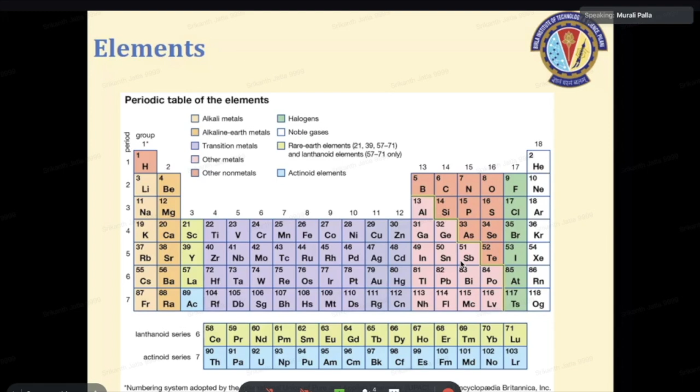And as we progressed in science, we now discovered that there are not 5 elements, but there are more than 100 elements that are there, most fundamental. And we have a whole periodic table. And again, these are very few elements. 100 elements is very small in comparison to the materials that we see every day. So how are so many materials coming up from the combination of these 100 different elements? That is something that is very interesting, right?

So how is this soil getting transformed into tasty mangoes, and what makes them so different? If you look at coal, it is made of carbon. Majorly it is carbon. And again, if you look at diamond, it's again carbon. But what makes it so precious? So atoms arranged in a different way become so precious, and atoms arranged in the other way can be so poor.

Again, another example, look at the chalk piece. It's made of calcium carbonate, a mineral of calcium. Then again, if you look at our bones, they are again made of calcium and collagen, right? So these are fundamentally the same thing, yet they have very different properties. The material bone has, they say,

Murali sir, your voice is not audible.

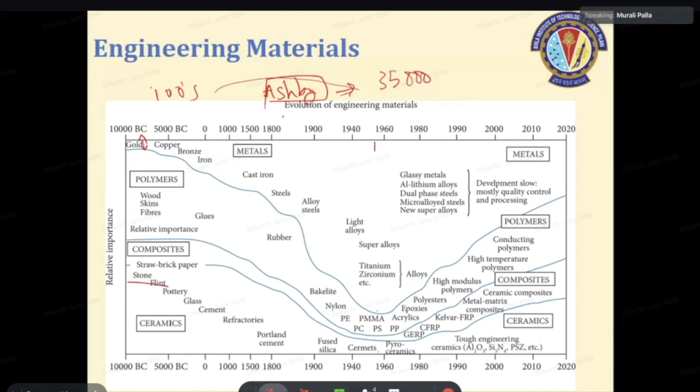And as we progress from the 1960s to the 2020s, we're again going back to the olden days. The importance of metals has been diminishing, and we are seeing more polymers, composites, and ceramics. This is an interesting observation. So many man-made materials have been developed. There are semiconductors, which make all the electronic gadgets, and superconductors. Research is going on; if we achieve room temperature superconductors, we all know it can make wonders.

Graphene and related materials have been discovered. So many new materials have been developed: semiconductors, superconductors, graphene, metallic glasses. Okay. Lightweight materials. If you have to fly in aeroplanes, the reduction in weight directly translates to economy, because the reduction in weight reduces fuel costs.

And that directly translates into saving of fuel and saving of money, so strength is a very important property of material. And likewise, electrical resistance - if you reduce electrical resistance, you can make less electrical dissipation, there will be less energy losses. There are hundreds of properties, and we still continue to invent more and more new materials.

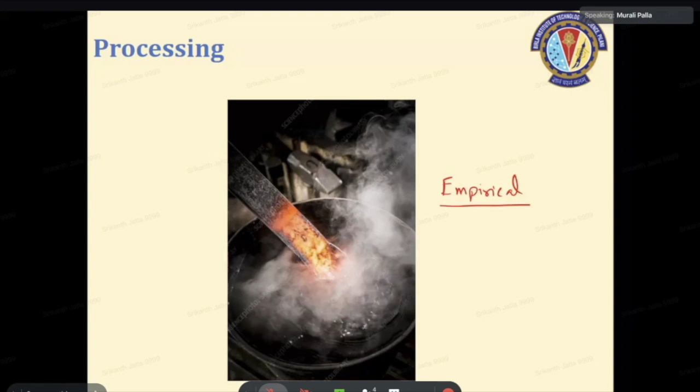I don't know whether it is true or not. People observed this quenching process when, in some European communities, people tried to kill people and used slaves for hardening their steels, for hardening their swords. They took the swords, heated them to very hot temperatures, and stabbed them into the slaves. They believed these slaves had some kind of mystical powers, and because of that their swords were hardening. What was actually happening is these very hot swords were quenched because of the cold blood in the human body, and such cruel measures were used.

But nevertheless, that is how things have been discovered, and to a much later stage, even today, many blacksmiths use this technique unknowingly. They don't know what is happening at the fundamental level, but they nevertheless use this technique to harden the material.

Even today, most of the engineering that happens in the materials community happens in an empirical manner. For many things, we don't know exactly what causes them - like how fatigue can be improved. People do a lot of experiments, and whenever the experiment clicks, we get a result. Something like coronavirus - we don't know what is fundamentally happening, how things are happening. People are trying medicines like chloroquine, invented for a different disease, and trying to do all these kinds of things.

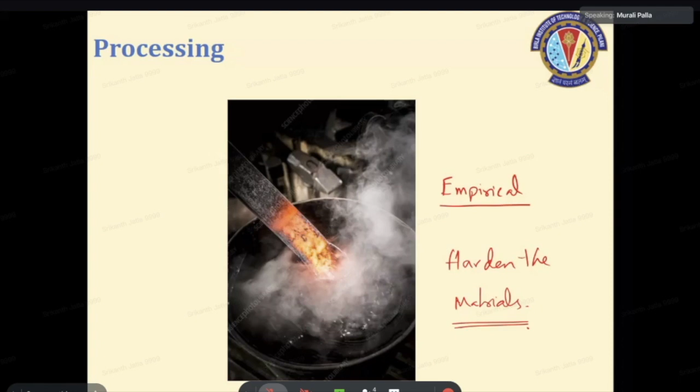So until we develop some kind of basic understanding of the science behind any phenomena, even today all we can do is rely on this experimental data. The effort in material science, which is a paradigm shift, is to understand how all these processes in materials can be connected to their fundamental things - how atomic arrangement can be manipulated to affect mechanical properties or any other properties. To achieve desired properties, how do we change this material? Understanding this is the usual paradigm we follow in material science.

So at the core we have something called structure. All the material is made of some building blocks, and these building blocks are arranged in different manners. This structural arrangement of these building blocks is the structure, and these different structures give rise to different properties. Now this structure can be changed by the processing, such as heat treatment - we have just seen an example - and this will lead to an improved performance. So this is our end goal: we want to make materials which perform.

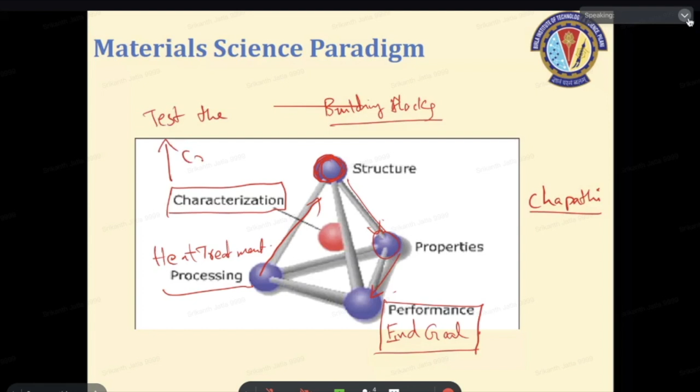So you have to test the crispiness of the chapati, crispiness or the tenderness or whatever you call it. So you have some vague property in your mind and you have to quantify that property and develop tools to measure that property and to tell whether it is meeting the goals or not.

So structure, characterization - these are the parts that we have to understand how to make materials. It's like the whole thing is about making materials. So in order to make materials which have very interesting properties, you need to understand all this basic and fundamental stuff which we study from 11th, 12th classes, very basic stuff.

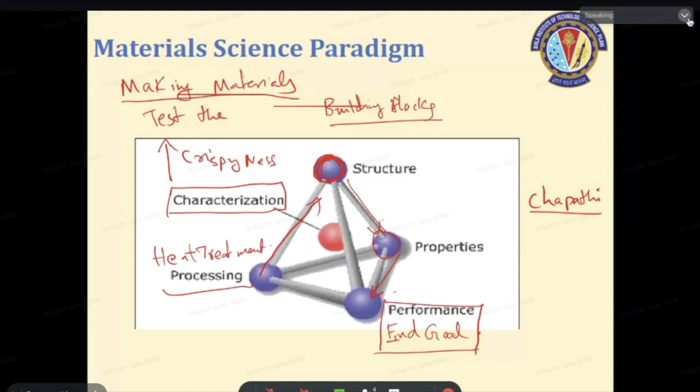So when we talk about the structure, what level of structure are we talking about? There is a structure at every different length scale. At a very small length scale, we have atoms. And atoms, we have at the nucleus, at the core, we have these protons and neutrons, and electrons in the shell.

There are still some ambiguities, like what is the internal structure of these protons. These protons have still further internal structure - they have some quarks in them. So we don't go too deeply into that structure. That structure is basically more interesting for physicists, who like to understand what is the structure of the universe and all that. You have to dig deeper into this atomic level.

Now at a slightly bigger length scale, we have these atoms, and these atoms are arranged most of the time in some kind of very nice patterns - not arranged randomly, they are arranged in some perfect nice patterns. We see beautiful patterns which are regularly periodic, repeating, and those patterns have been classified.

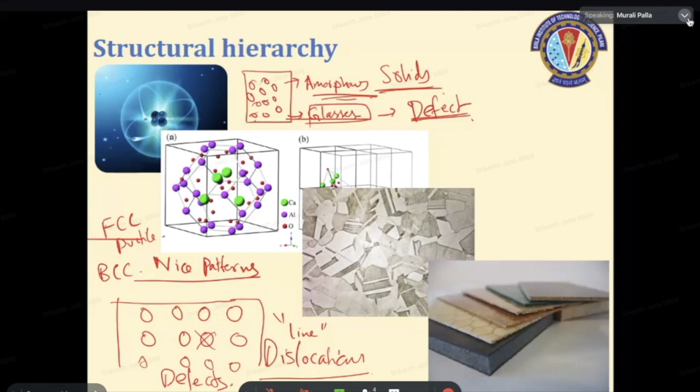These are aspects of crystals. Now, if you talk about glasses, because there is no periodicity in the first place in the glasses, we do not have anything like a defect in our glass. We can't have a vacancy because we don't see any periodic pattern there. So it's very difficult to describe what is the defect in our glasses. But still, the glasses also show different types of configurations and they have different properties. We'll speak about it a little later.

And a little above this crystalline structure, at a larger length scale, we see this microstructure. What is microstructure? These crystalline materials, the periodicity will not endlessly continue. It remains only up to a certain region. Now, if you cross this region, then you will see another crystal in a different orientation and so on, and you see different phases. These phases are distributed at a length scale which is of the order of 10⁻⁶ meters, that is micron. Hence we call this structure that is revealed at this length scale as a microstructure.

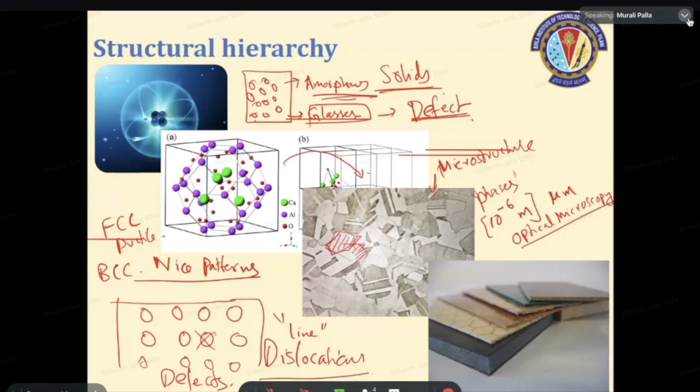And this kind of structure that you can see on materials can be viewed from an optical microscope. So materials can also be manipulated at this level to change their microstructure and to achieve desired properties. Now, at a much larger length scale, you have this macrostructure, where things are really big, meaning you can visibly see with your naked eyes. So you have things at the millimeter, and you can also have things at the meter and kilometer ranges, right? So this is the whole gamut of structures at different length scales. And we have so many materials, and each material is manipulated at a different level, at a different length scale.

And so many experimental tools are there to characterize this microstructure. Our interest in computational material science lies in all these length scales. So there are people who work at different length scales. At a very small length scale, if you have to understand what is happening here at the fundamental level, what physics should you use? We use quantum mechanics to describe material at this level. You have computational tools to solve these quantum mechanical equations and to predict things that are happening.

And then we have molecular dynamics, atomistic simulations, Monte Carlo simulations to study things at slightly larger length scales. And then we have phase field modeling, CalPhaD, etc. tools to understand things at this length scale, the microscopic structure. And at a much larger length scale, we do things by very regular routine tools that are FEM-based tools, ANSYS, Abaqus, and so on.

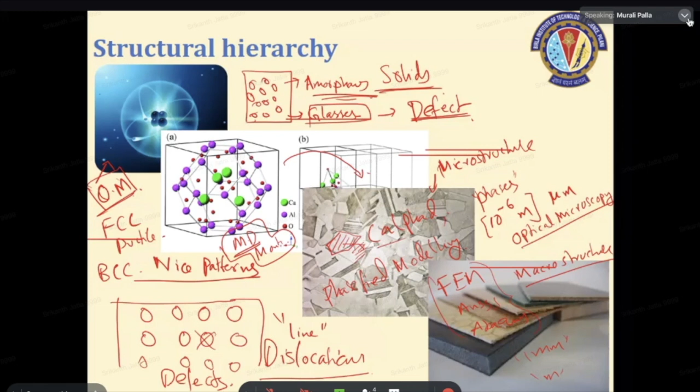So what computational material science you are doing depends on what length scale you are studying. It's like at what length, what is your interest, okay? And depending on your background, you can pursue research in any of these areas. And before going to study, you first have to be clear with your fundamental concepts. This is what I described here. There are different tools at different length scales. To understand all of these things, you have to first dig into our basics.

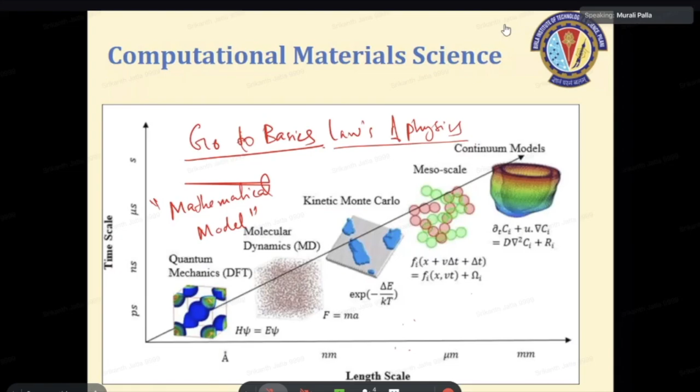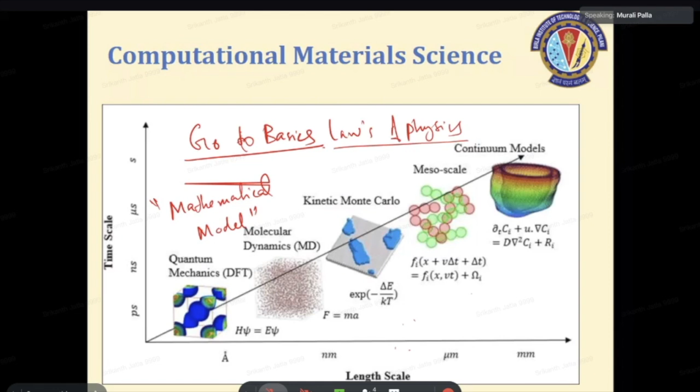So whenever you have a composite, you mix materials which have complementary properties. So one is like very high. Bones need to have rigidity. If the bones are not rigid, the bones will become limp. It just looks like a skin. Imagine a man without bones. It simply limps, right?

So stiffness is an important thing, but if the material becomes very stiff, then it becomes brittle, and the material will fracture very easily. So here you need to have a material which has very high rigidity as well as high toughness. So bones are cleverly constructed in such a way that they have these two properties.

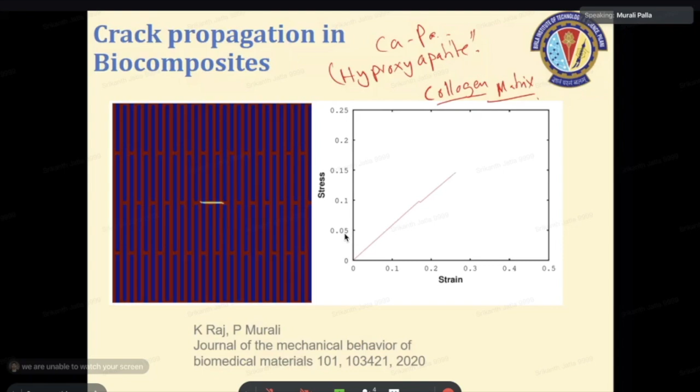Now can you see my screen? Yeah, it's loading. Yes. Good afternoon.

We will now discuss how to do these things in computation. So basically what we have here is we first have some physical law. It can be many things. It can be Schrodinger's equation, it can be Newton's law, or the diffusion equation. This physical model, we can describe in some kind of a mathematical model.

So from the physical we get a mathematical equation. This job is generally done by physicists, and sometimes we as materials modelers also invent new equations such as phase field equations. So there are so many modeling techniques and so many equations. Solving each of these equations, we will be able to solve different varieties of problems that occur in materials science.

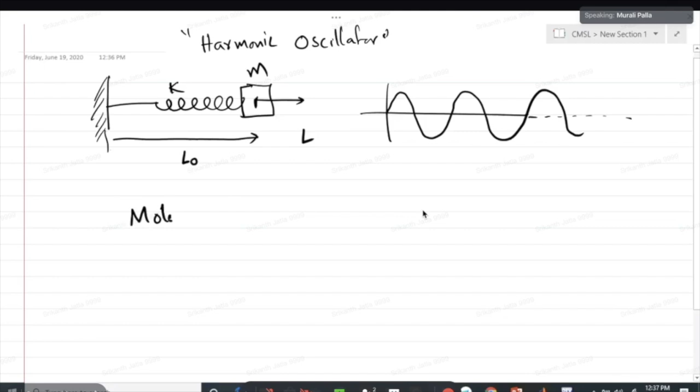Okay, if you understand this thing, you will understand the whole thing of molecular dynamics. Okay. Essentially, in molecular dynamics, we do the same job, but here the only difference is here there's only one mass and there's only one spring. But in molecular dynamics, we have n number of atoms. It's so many springs. So you have one atom here, one atom here, one atom here. You have different atoms, and then each of these atoms are connected by springs.

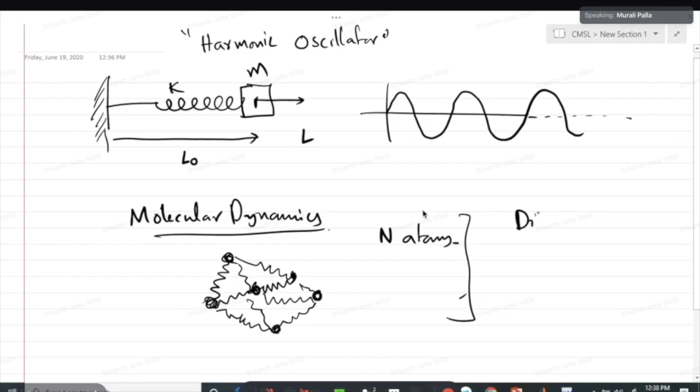So to understand all these phenomena, first you have to understand these two basic things. Okay? So later, if you want to graduate to other subjects, you can study. You can also try to solve the diffusion equation, the Cahn-Hilliard equation. So you can do this as exercises. Okay? So you take this diffusion equation and try to solve it numerically and see how you can predict different things from the diffusion equation.

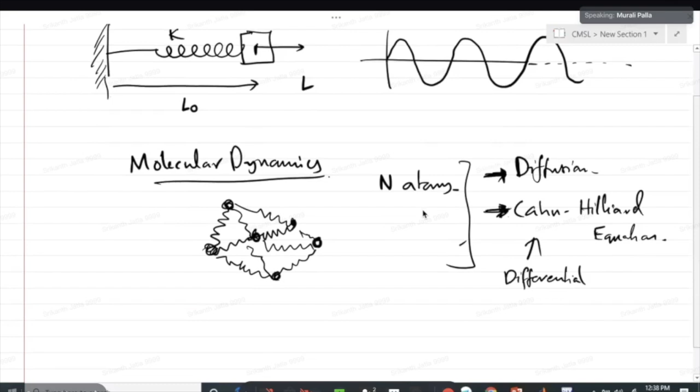You can also do a numerical investigation of the Cahn-Hilliard equation, which is again a differential equation. You can search in Google. It describes the microstructure evolution in solids. Okay, so different equations are there. We'll start with the simple things.

Okay? So what equation governs this first problem? The first problem is governed by the following equation: F is equal to ma. Very simple. Okay? So what is the force that is acting on the spring? That is minus kx, this is Hooke's law, is equal to m d²x/dt². So we got a differential equation here. Now this differential equation we have to solve numerically.

So what is the analytical solution for this equation? When we study numerical modeling, we always study some simple models, okay, and then the same principles will go into the more complicated problem. So here the equation is simple, you can easily solve it analytically, but you can also try to understand numerically how to solve this equation, because it has important implications in molecular dynamics simulations.

So you can recast this equation as d²x/dt² is equal to minus k/m x. If you solve this equation, you will get x is equal to some c1 sine of √(k/m) t. You can put some appropriate boundary conditions, and then for some appropriate boundary conditions, you can show that the solution is something like a sinusoidal function.

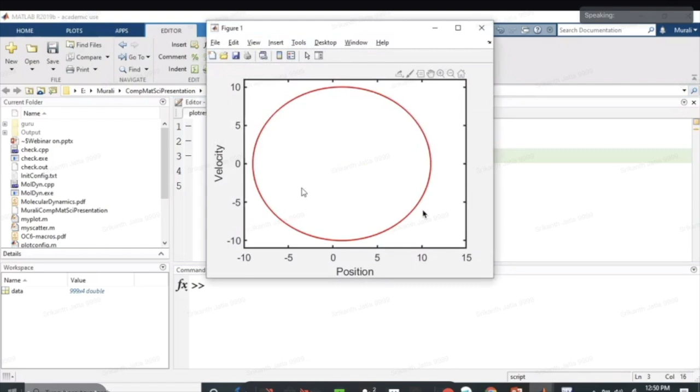So the same principle we use in solving molecular dynamics. So I'll open another code here. These two codes I will share with you. I'll share them with the organizers and they can share them with you. Please be in contact with the organizers.

So this is the main molecular dynamics program. I have created this only for the purpose of illustration. If you understand this simple code, you can operate any molecular dynamics simulation code. First, you have to understand what is going on. This code will not be very efficient from the speed point of view, but it has all the necessary ingredients in it. Okay?

So in molecular dynamics you have some variables. Let us first look at the variables here. I have defined a class and these are the variables. We have x coordinates of all the atoms. This is a two-dimensional code; for simplicity I have written it in 2D. Y is the y coordinate of all the atoms. Vx is the x component of the velocity of all the atoms. Vy, ax is acceleration, ay is acceleration.

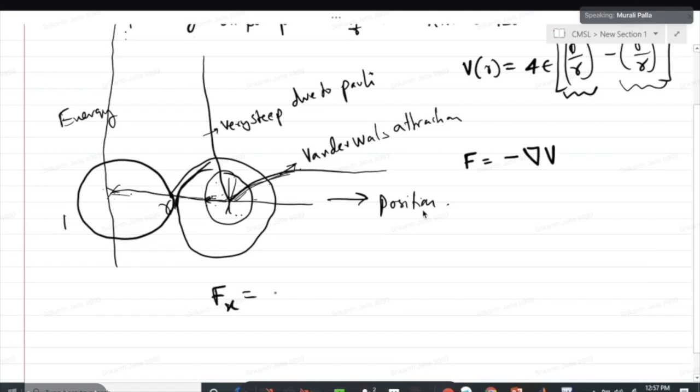So this is a potential. This part describes the repulsive part, and this gives the attractive part of this interatomic potential. Alright. So in order to calculate the force, we have to write F is equal to minus gradient of this potential energy. If we do that, we get Fx is equal to minus ∂V/∂x, which is given by minus dV/dr times ∂r/∂x.

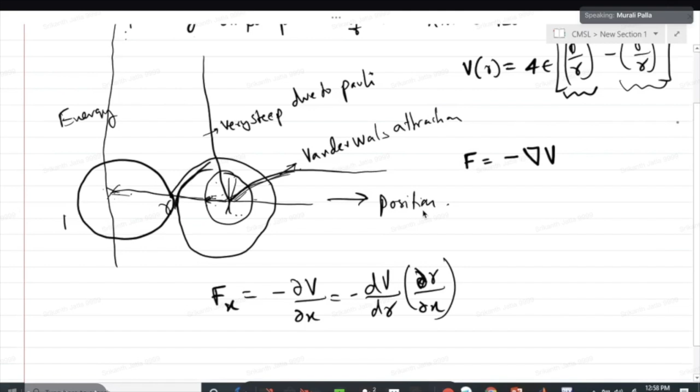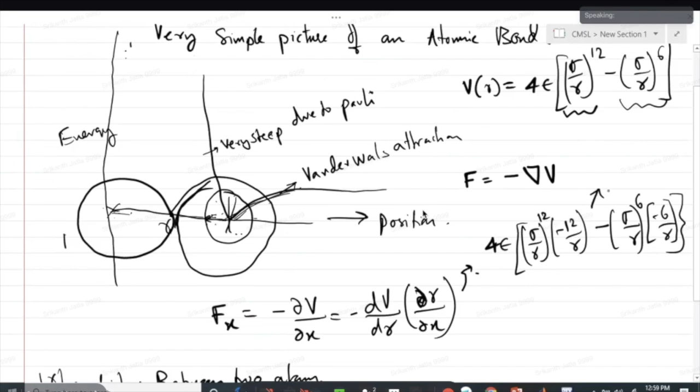Now what is r? r is equal to the square root of x square plus y square, where x and y are the coordinates between these two atoms. Okay? So let us take a system where the first atom is at a location given by x and y, and the second atom is located at a point whose center of mass is at xj and yj. What I want to do is calculate the force on this atom.

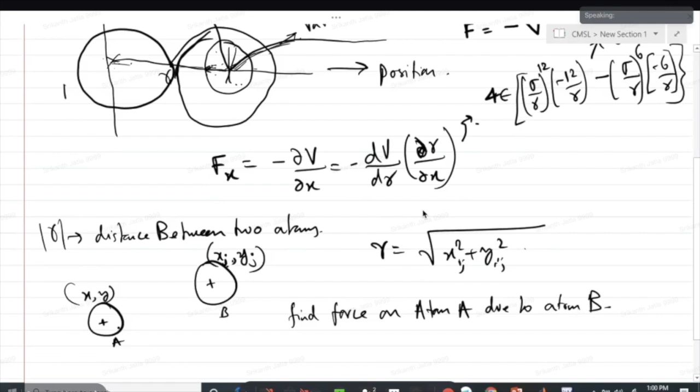Let us call these atoms A and B. Find the force on atom A due to atom B. How do you do it? First, the dV/dr term will be the same thing. Calculate the distance. That will be the square root of (x minus xj) squared plus (y minus yj) squared, that is r. And if I do dr/dx, I'll have (x minus xj) divided by r. Now plugging back all these things, I'll get the force between these two atoms, and I'm ready to solve the problem.

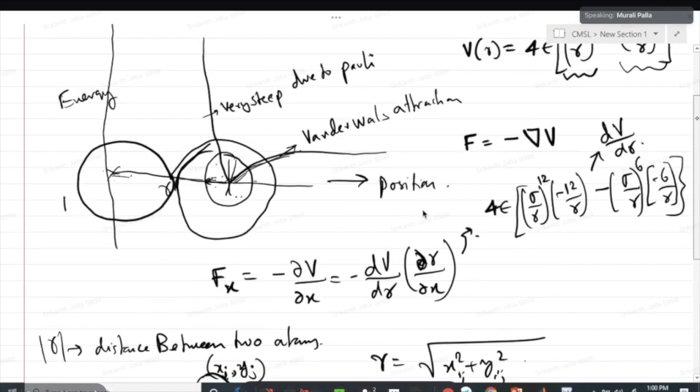So the following steps are there. First, create atoms in a lattice structure. For that, you can use lattice vectors plus basis. You take two lattice vectors and multiply them n number of times in order to get the atomic positions. So it's like x, y coordinates.

So what I do is I first calculate the mean velocity in the x direction and mean kinetic energy, and in doing so I'll also first initiate all the accelerations in the same loop, the initial accelerations to 0.

I'll calculate the average kinetic energy and subtract these mean velocities from the velocities so that there won't be any net movement of the material. So the material will not simply start moving. And the amplitude is calculated in such a way that the desired temperature is achieved. So if you do this, we get the desired temperature, desired kinetic energy in the system. This is how we start the velocity.

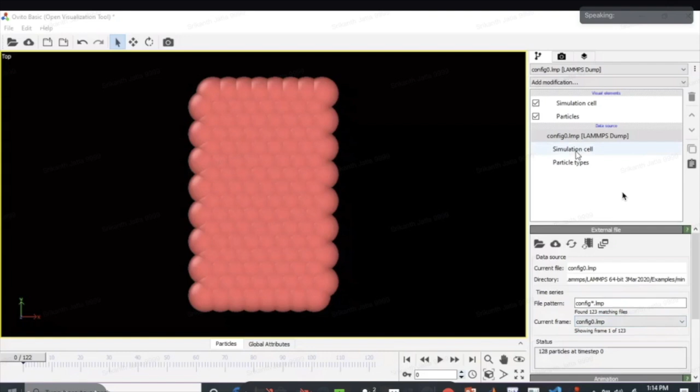So these radii are arbitrary. You can choose whatever atom. Strictly speaking, the atoms are point-like objects. You tend to think of radius where the two atoms meet. That's all it is.

If you do the same simulation at a higher temperature, you see the following type of thing that you have run.

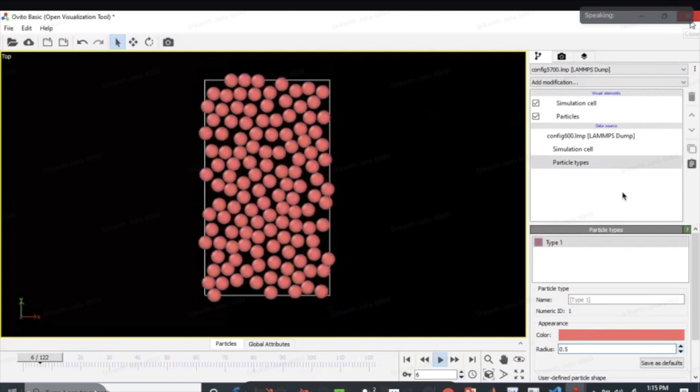I would like to end my simulation presentation here.

So let us run the same thing with the software which we have written. This is what this gives.

Finally, the end result of molecular dynamics is that in order to see whether your simulation is equilibrating or not, you have to plot the potential energy as a function of time. If you see that these things are fluctuating about a mean value, that means it is equilibrating.